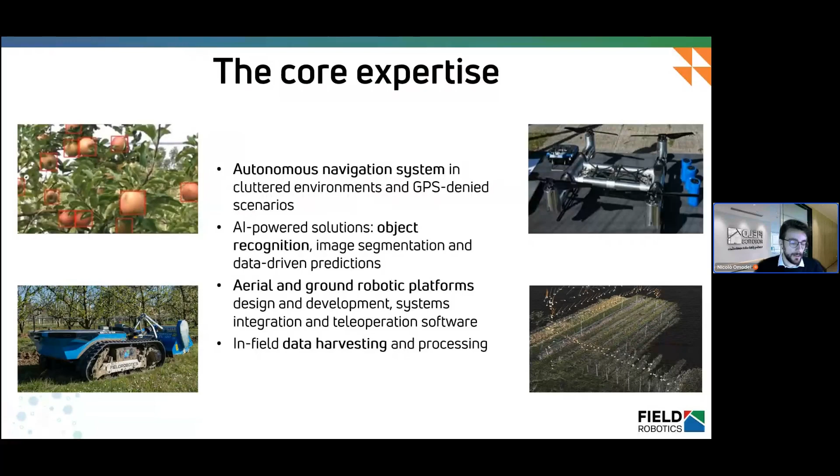FieldRobotics has its main core expertise in autonomous navigation systems in GPS-denied scenarios. Our algorithm, our software, can be applied to terrestrial vehicles, but also to aerial vehicles. With this kind of system, we are capable to navigate also where GPS is not present. We have, of course, AI solutions in order to perform image segmentation and object recognition. So as our vehicle autonomously moves in the environment, we are capable to collect data and perform what is called data harvesting, and then all the data will be processed in order to extract useful information.

FieldRobotics has 2 main divisions. The first one is the search and rescue division, which is focused more on aerial vehicles in order to perform search and rescue in very harsh environments and also land and sea defense. The second division is about agriculture. Here we developed a multi-purpose platform in order to perform every kind of operation needed inside orchards and vineyards. So today my aim is to show you the agriculture division inside FieldRobotics.

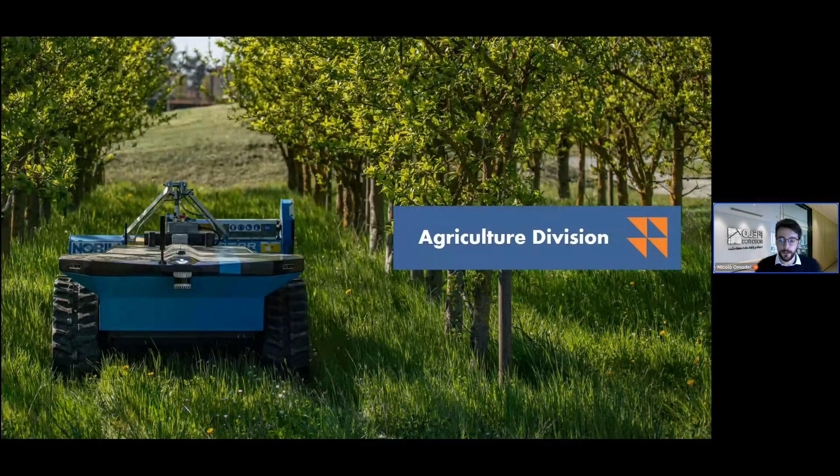Our mission is to develop and commercialize a platform which is fully autonomous and fully electric, and has a sort of plug-and-play array that allows the platform to perform every kind of operation. So the vision here is quite different from the standard, because we would like to redefine the tractor concept in order to not have anymore the traditional tractor on the field.

So the main concept that guided us during the whole development is that we would like to have a powered implement instead of a tractor pulling an implement. With this concept in mind, we can reach a compact and integrated design with a very lightweight structure, which allows us to have very low soil compaction in every kind of weather.

The other main concept and main feature is the adaptability and flexibility of the platform. You can imagine that once you have an autonomous platform working and moving autonomously in the field, you can then design a sort of plug-and-play array of implements.

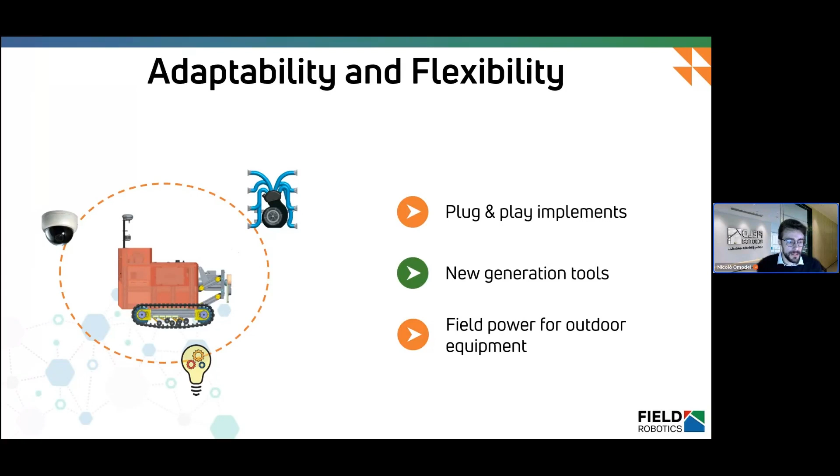Then another feature is what I like to call the power bank in the field, because once you have the platform that moves autonomously and you have batteries on that platform, you can imagine that you can attach every kind of thing you want and charge every kind of implement you want. I was thinking about maybe scissors in order to perform pruning, tree pruning.

Another big concept is the solution we have in mind: a larger number of small tractors is better than a small number of large tractors. We're used to seeing very big tractors in the field with a lot of power that maybe isn't needed. We have examples nowadays inside warehouses with AGVs moving autonomously and working as a fleet. We'd like to bring that fleet concept out from the warehouse and have a large number of small tractors inside the field, capable of communicating and collaborating together.

Here in the image you can see our first prototype, called Dedalo, with the features I told you before. We have a very small and lightweight structure, which gives us stability and robustness. This platform is capable of autonomous navigation and is fully electric.

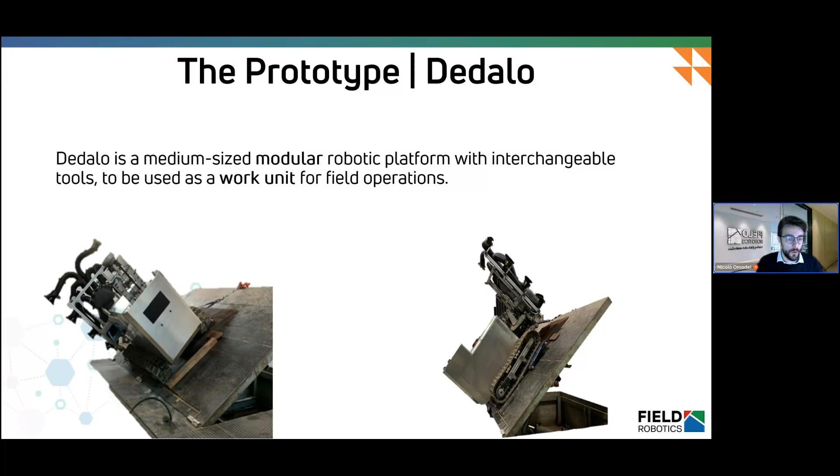Then we developed a second prototype with the same concept as the first, but with a very renewed design, more like an industrial product. On this platform we have more power: two 5 kilowatt motors for traction, and a 10 kilowatt motor just for the PTO.

Let's go more into detail about our autonomous navigation. This is a more technical part, but I'll try to keep it simple. I'd like to highlight that all the hardware, but also the software, has been developed inside FieldRobotics. We try to maintain a modularity scheme during development. In this scheme, every single software component performs a specific function in order to control a submodule or add new functionality to the vehicle.

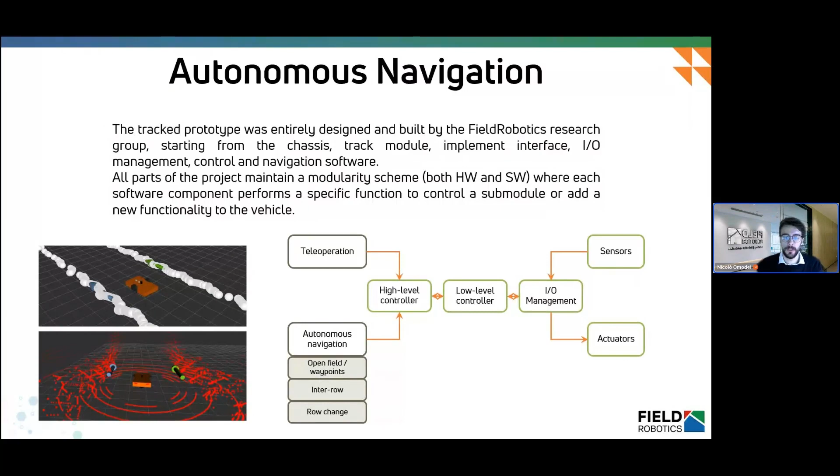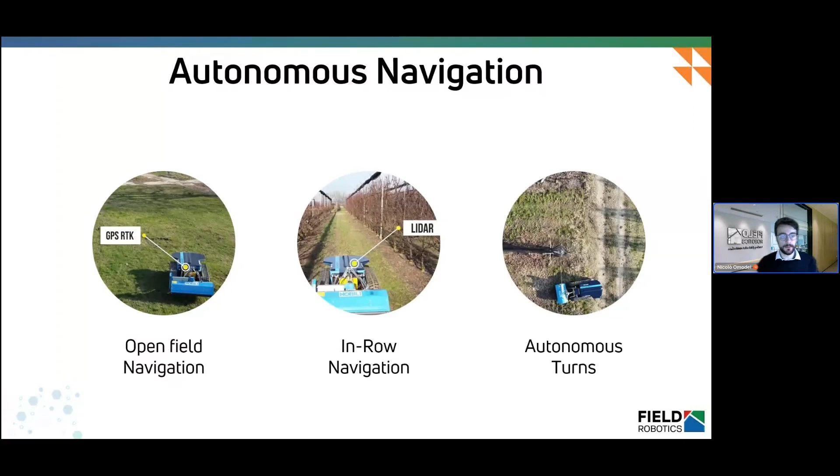So now we have seen a more technical part, but let's see how all these algorithms are used in practice. We have autonomous navigation, which can be divided into three main areas: the open field navigation, the in-row navigation, and the autonomous turns.

Let's start with the open field navigation. This is used in order to reach, maybe from the warehouse, the field in which we have to perform the operation, and it's a sort of waypoint navigation in which the user should set a series of waypoints or a series of roads, and then the platform will follow those points.

Once we are inside the rows, as I told you before, we don't use the GPS signal anymore, but we use just the LiDAR. This is because the GPS signal in some environments, in some conditions, cannot be as precise as we need, and so we just have to avoid this problem by using other sensors.

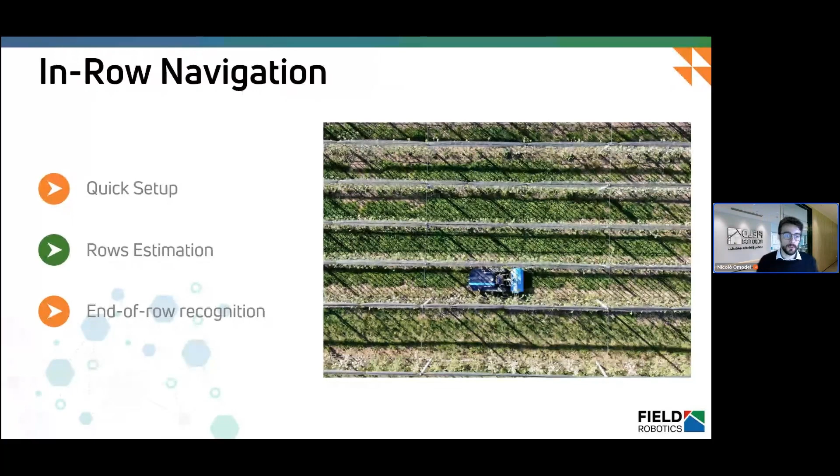And so once we perform the row estimation, we are also capable of recognizing the end of the row. So from a user perspective, the configuration is very, very straightforward.

We just need three parameters. We need the row width for each row, the first turn direction, because all the following turns will be the opposite, and then we have the number of rows that the rover must process in order to complete the whole operation. So just three parameters to perform the whole navigation cycle.

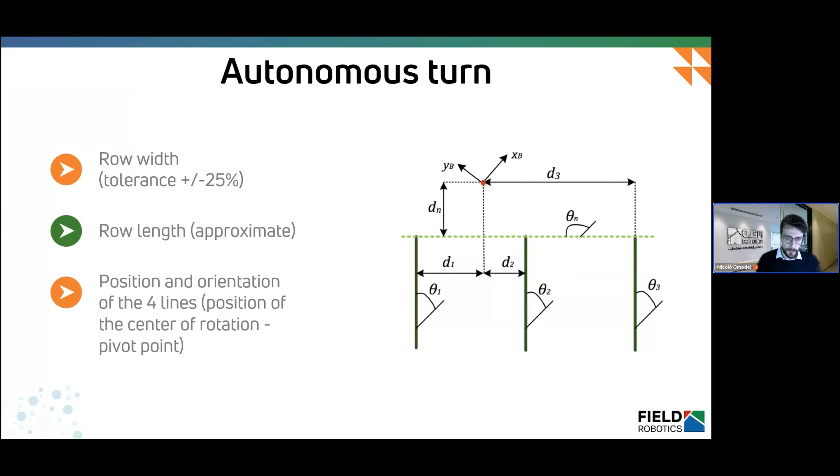Then when we are at the end of the row, we are capable of detecting the end line and computing a trajectory in order to go inside the following row. We can do that because we have the estimation of the actual row, and we can determine the position of the center of rotation, which is the pivoting point, in order to enter the following line.

An additional feature that we have is that we start estimating the next line from the very beginning of the operation. In this way, we are capable of achieving very high precision in the next row.

Here we can see an image. I like to call it robotic-friendly orchards, because we tested the machine in our experimental field in Bologna. Here in the picture, we have a type of orchard which is a planar experimental orchard. Those are apple trees, and they have a sort of two-dimension structure. This planar structure, of course, you can imagine, is quite easy to navigate inside.

But of course, we tested the robot also in several orchard architectures and also in vineyards. It has more than 1,000 hours in the field, test field.

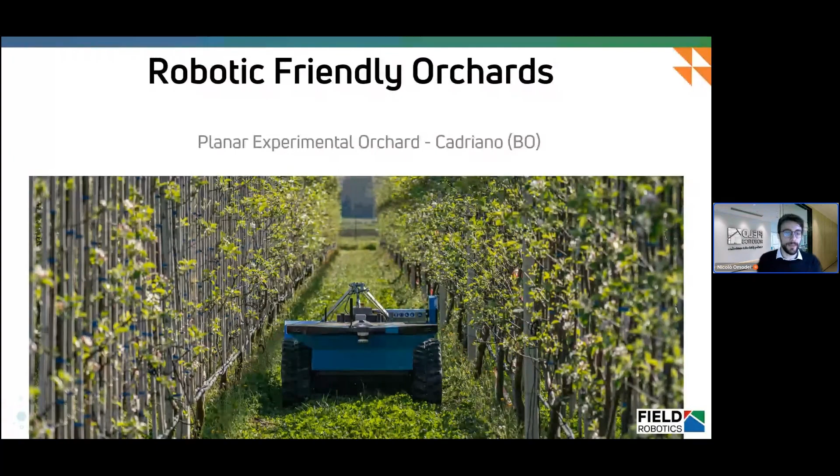Here's a quick brief on future developments. On the left side, you can see our low dispersion sprayer. We started from a traditional sprayer and adapted it to the rover in order to have very low power consumption. On the right side, you can see a tool which, again starting from a very traditional tool, we electrified. It's used to perform every kind of inter-row operation.

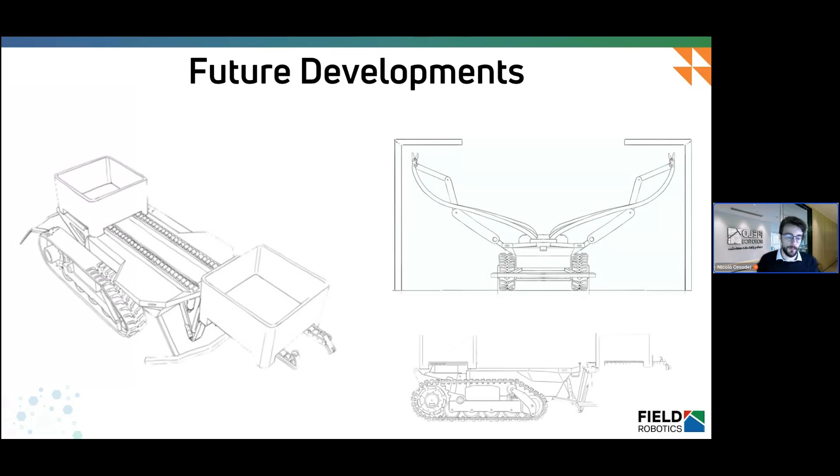So I think that's the end of my presentation. I hope that was as clear as possible.

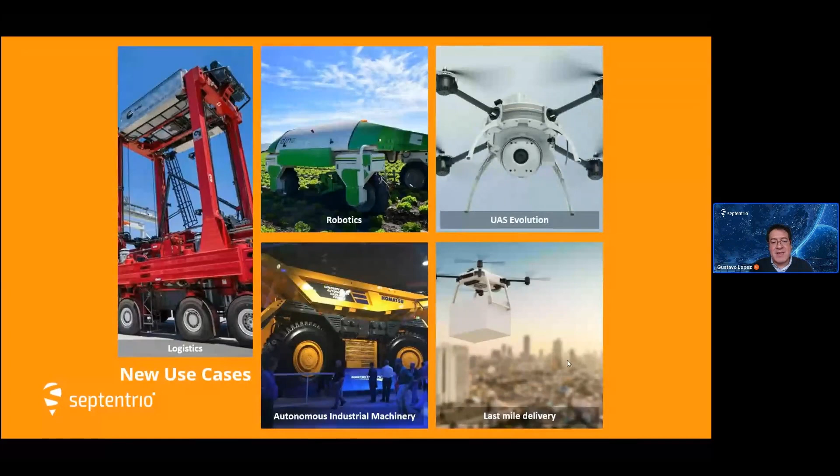There are different types of use cases where you already see autonomy, all the way from big machinery - as an example, here you can see a Komatsu haul truck. Autonomy was already one of the first places where this happened, and has been there for several years. But we also get to see other types of systems in logistics, ag robotics, as we saw this morning, last mile delivery, drones, etc. This is really an exciting moment that we get to see.

Let's start with the industrial side, the heavy machinery - what we get to see there. As you know, there are multiple companies, OEMs, creating these big machineries, and they are trying to move further into automation and autonomy of these vehicles in the market. Again, it all started with haul trucks that were already kind of autonomous, and we see those already deployed in mines and things like that. But we also get to see new types of vehicles trying to integrate autonomy into their use cases, for productivity or for other safety elements. That's what we get to see in industrial use cases.

And the interesting part is also how these autonomy levels are increasing over time in that market itself. At the beginning, when we are thinking about level 0, 1, or 2, these type of companies were focusing mainly on creating a basic autonomy and a steering type of autonomy, which was bringing productivity and efficiency. That was basically what they were trying to reach as a main goal.

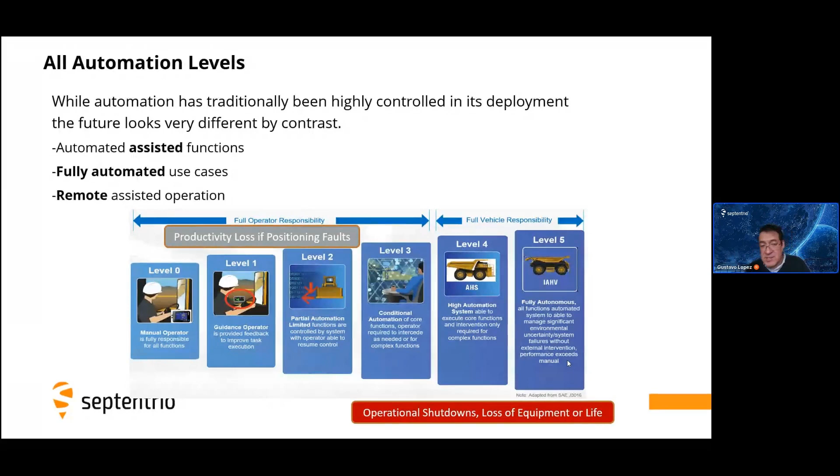But at the moment that we are starting to integrate full autonomy, the trends became a bit different. People really want to avoid operational shutdowns. They want to have a very safe system behind it. And therefore, the type of requirements that happen on the GNSS or the inertial systems out there are also changing over time. So it's very interesting to see what happens there.

Then we have robotics, and this is something also I love. I love seeing the talks, as we saw this morning, bringing fantastic new use cases in different areas. We heard about agriculture, but there are delivery robots, marine robots, mowers which are operating in different environments, such as solar panels which are obstructing some of the GNSS signals, security cleaning, snow cleaning, and many other use cases that we get to see in the market, which is very interesting to see how this is evolving.

And again, the requirements for precision and reliability are also increasing. So this will give you a bit of a view of the trends or main demands that we have in the market from the GNSS point of view.

People want to have systems which are smaller, not for all types of robotics or all types of systems, but even if you have a box type of system, they would like you to have it also in a small form factor. Or if it's a very small robot, then you would even like to have a module behind it.

All these types of robots or drones sometimes are working with a lot of electronics, communication. You have a processor behind it, data recording. So all this could also create some unwanted interference in the system, and you need to be very resilient against those types of interferences.

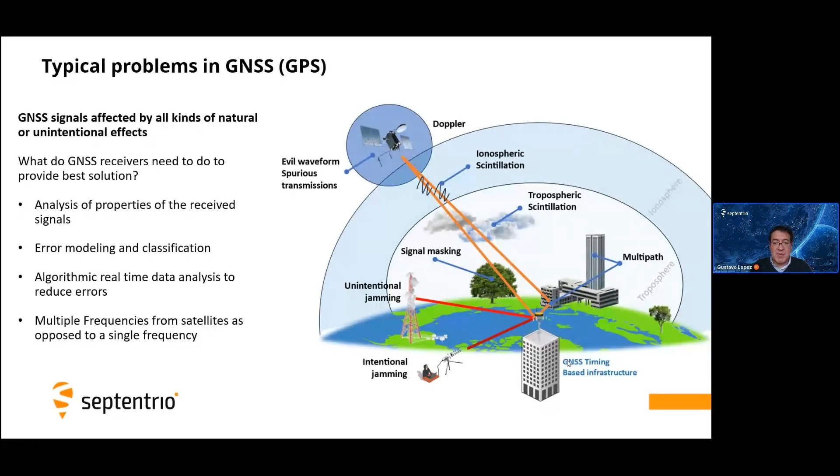So a reliable GNSS really needs to overcome all these types of problems. And this is also what we try to do at Septentrio, working in all these different areas to mitigate that, bringing a GNSS system that, as an example, has multi-constellation, multiple frequencies that can support anti-jamming, anti-spoofing for those security problems, that can work with different correction services out there, because there are a lot of new correction services and new companies popping up. And again, keeping it as small as possible while providing you the right interfaces to interact for your autonomous system, for your robot, or for your own integration.

So let's go a bit deeper on this reliability topic, and what are the things that we are trying to do in order to mitigate that part. But let's first try to define what we mean by that reliability concept.

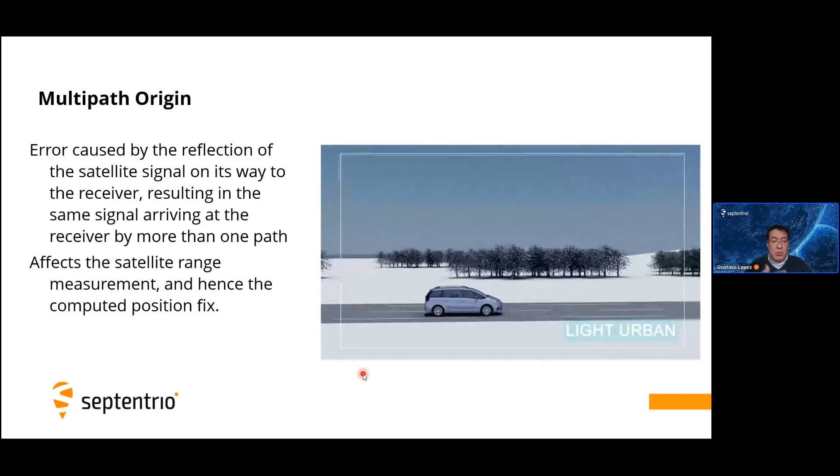Multipath is basically the reflection of GNSS signals when they hit walls or other surfaces. As an example, in agriculture robotics, sometimes you have trees, and trees with water are a very important element of multipath for GNSS, because we have those reflections of the signals themselves.

So how can you remove or mitigate multipath error? There are different types of techniques, and I've grouped them into 3 elements. One could be the design of a new signal system. As I told you, there are certain signals capable of handling multipath better, like the BOC or AltBOC signal. Another mechanism could be using other backup signals, or correlation techniques, which is mainly algorithmic. And the third element is antennas in the market that can also reduce multipath effects.

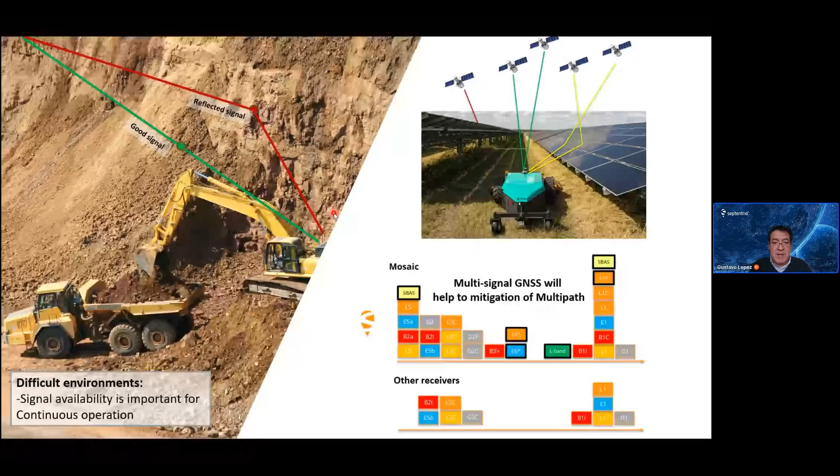With all this machinery and automation happening in robots or big machinery, there are a lot of reflections that we get to see, so multiple signals will help a lot. And of course we also have algorithms. As an example, here you can see how we can reduce multipath using some proprietary algorithms in the GNSS element. That makes a difference on those difficult environments where GNSS reception is not ideal.

Briefly on the security and resilience side, we get to see this more and more. Customers integrating autonomous technology are having problems with jamming and spoofing, and unfortunately this is happening more and more due to the geopolitical situation nowadays. I'll explain some of those problems in a minute.

Then you have spoofing. Spoofing became very popular with Pokemon Go, but it's basically sending a signal that pretends to be the authentic GNSS signal, when in reality it's a wrong or fake signal taking you to an undesired location. This is something you won't want, and it's happening more and more. Before, spoofing really didn't happen, but the technology to do it became more available, and the fact that there are more robots out there is creating a big problem. Imagine your mobile robot suddenly going to the wrong location because somebody is spoofing it nearby—it's becoming a problem.

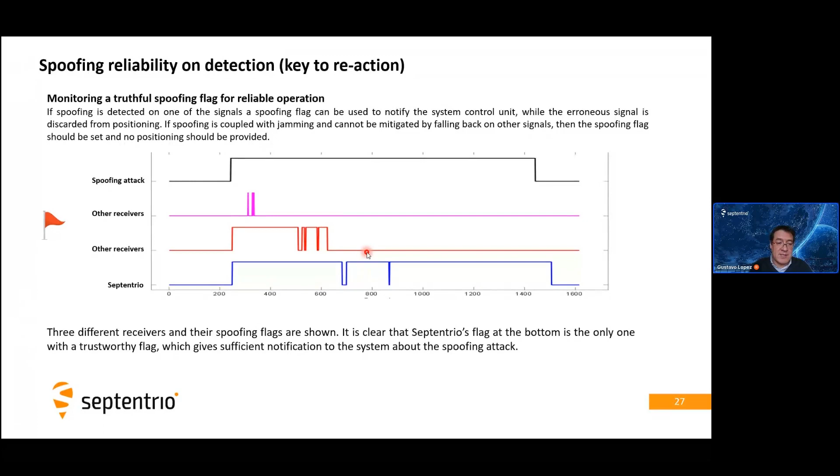Then you have certain receivers that sometimes might detect the attack, or maybe they will not detect it at a certain moment. So the reliability of that spoofing flag is really quite important, because then you can tell your INS or your sensor fusion system that you can no longer trust the GNSS. This is also very important, and we are really trying to make sure that's quite reliable on our side.

Other elements of robustness, just to mention: when you have a GNSS system in an autonomous vehicle or robot, it's operating in multiple tough environments, and there's a lot of vibration in some occasions. Some people think a small robot isn't really vibrating a lot. You can also see there's rough terrain in many occasions, which could trigger problems with the GNSS technology.

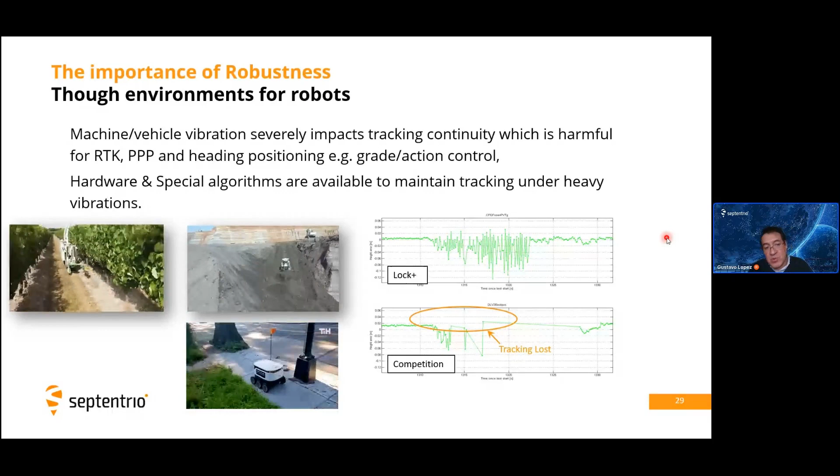So you need reliability also in the choice of GNSS that can bring you a good, robust solution for the whole robot itself.

This is my last part, going very briefly into the integration with Movella, and some of the data I actually got thanks to the team from Movella. The beautiful part is you can integrate a Septentrio receiver together with Movella systems.

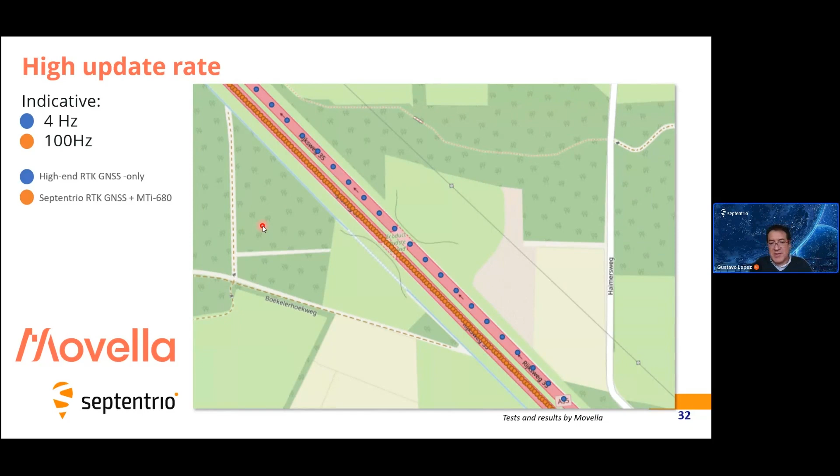They have done a few tests that you can see here as an example, comparing a Septentrio RTK receiver combined with the Movella system versus other high-end RTK systems. This example shows the value of the high update rate you can get with this combination.

You can see the dark blue line, which is the combination of these two systems. Another example again with dead reckoning, a bridge of 21 meters. Again you can see how that reliability definitely helps the final solution.

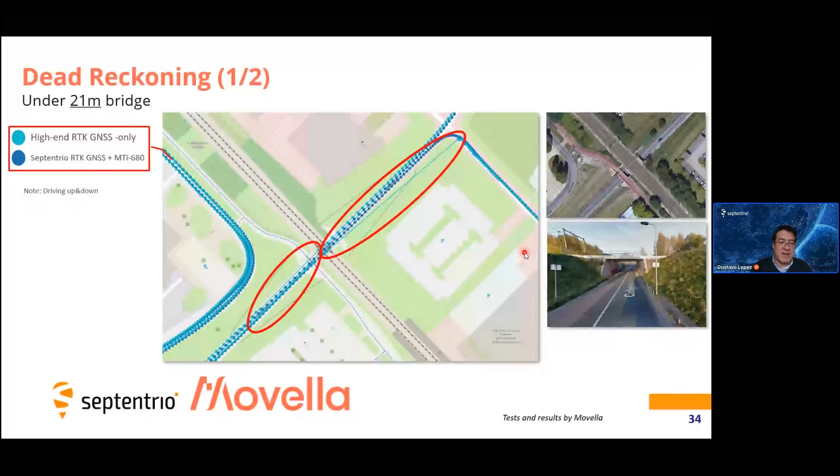These are very nice examples. Again, thanks to Movella for providing this test. So how will you integrate it?

Well, you have two options. Option one: you have a dev kit from our receivers that you can use together with the dev kit from Movella. This is fully documented in an article you'll find online. Or option two: we did an open source project integrating the Mosaic into a mikroBUS-compatible board, using the pin compatibility that these types of boards from Xsens Movella use.

So that's definitely an option too. But option one is already fully documented, fully working, and we definitely welcome everybody who might have questions on that.

Reliability can be quite important, but to predict the future is up to you. I'm sure you'll come up with a lot of exciting applications integrating either GNSS or INS systems. So I don't know if there are questions, Minder, at this moment.

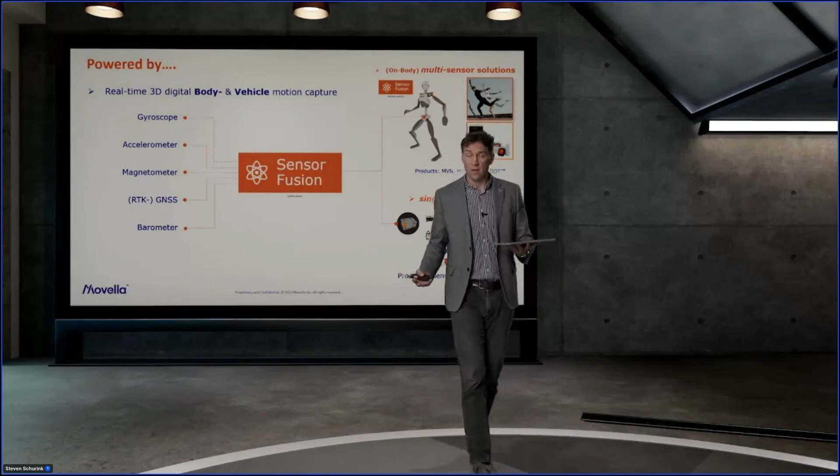These are typically applied not only on land-based vehicles like we're treating today in this conference - outdoor and indoor ground vehicles, AGVs, AMRs typically used indoor - but outdoor there's many other vehicles like in the agricultural scene, person transport or goods cargo transport, container terminals. These are typical ground vehicles that need digitized movement data to either autonomize the vehicle, make it safer or more efficient, and support the operator.

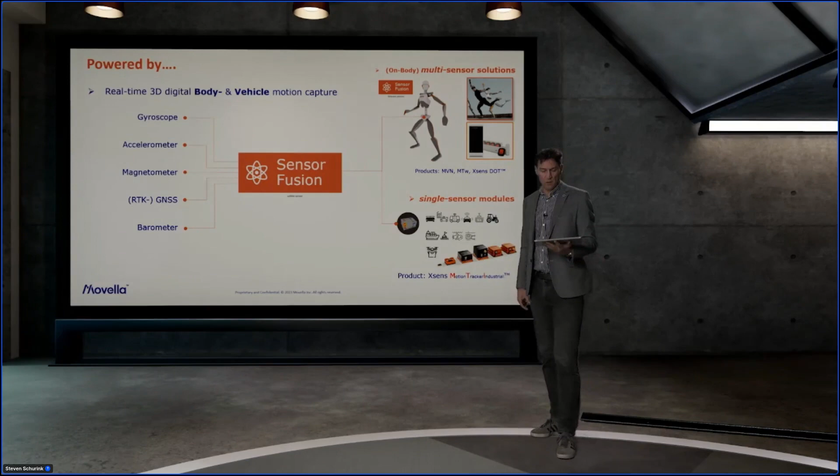The other markets we're also serving include service vessels and also buoys and typical underwater robotics - a very interesting scene where a lot of innovations are taking place. The last is flying, like Gustavo shortly showed in his presentation, like last mile delivery of packages and these kinds of drones, but also other drones for surveying areas. So these are typical applications and markets we're serving with the single sensor modules, the MTI series.

A little bit more detail on this MTI is basically the data that we are providing to our customers' subsystems: 3D orientation and global position data.

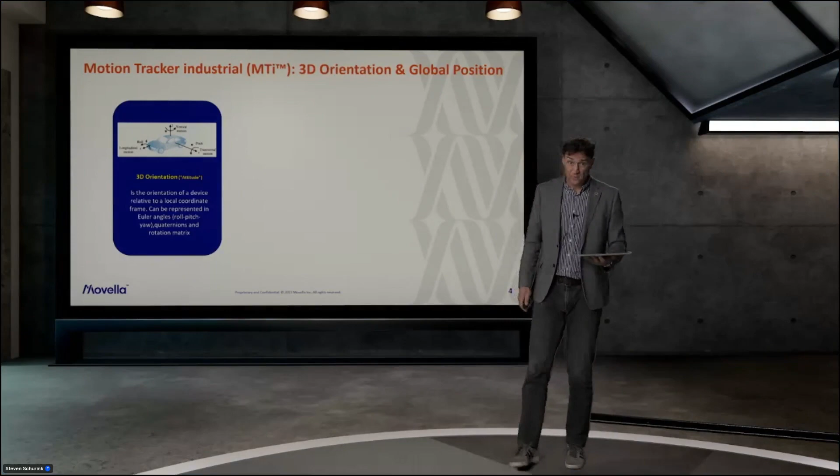So what is 3D orientation? It's typically the roll, the pitch, and the heading, but also linear acceleration over X, Y, and Z. So it's the orientation of the device, or the vehicle in this case, mapped on the earth-fixed frame. They call it ENU, so east, north, up frame. We give you the orientation of the vehicle on that frame. So that's 3D orientation, something else than 3D LiDAR. Not completely the same, but both are 3D.

In addition to the 3D orientation, we provide our customers with the global position data. As in the previous presentation, there are different brands of GNSS, of course. This is typically the position of the vehicle relative to the geographic coordinate system, so latitude, longitude, and also an altitude indication.

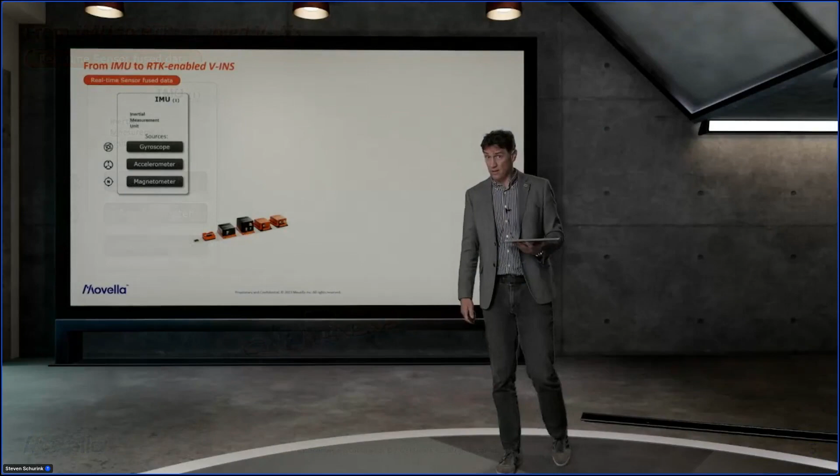So what does this look like in detail in our sensor? We can offer our customers different levels of data. Some customers say, hey, I just need the raw data from the gyroscope and accelerometers, I will do my own Kalman filtering. That's fine, we will supply to you an IMU. That's the basic level of a typical inertial measurement unit. It's raw but calibrated data that our customers use to determine the 3D orientation of their vehicle.

The next level, when they start using our Kalman filtering, also the Xsens Kalman filter algorithms, then from the same sensor you get the roll and pitch angles, and also the unreferenced or relative yaw in the flat plane, which is typically used for navigation. And that's the subject of this conference.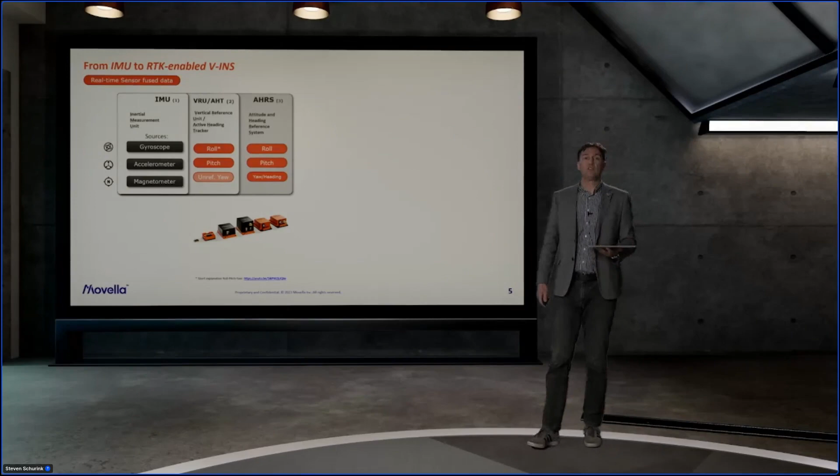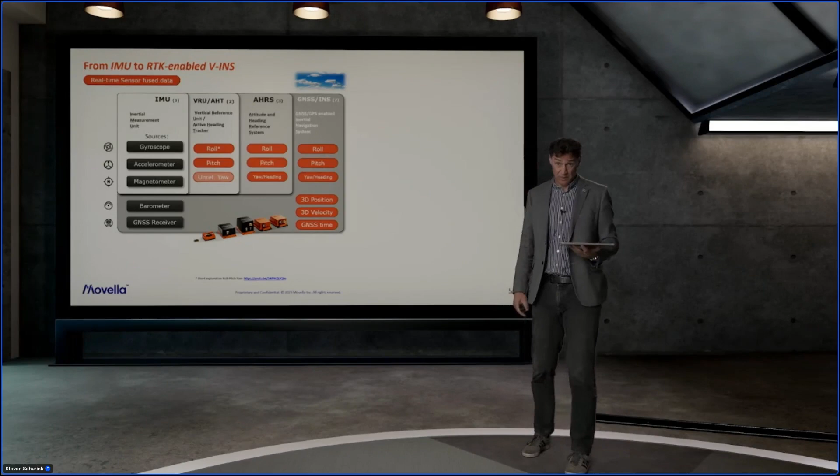Again, a next level is we start using the magnetometer, so you also have absolute north referenced heading, not relative angle but absolute north referenced. Then the next step is to use also your GNSS data when you are outdoors. We can improve the 3D orientation data, and we can add position, velocity, and sometimes also necessary for customers, the GNSS time being the master clock of their system. So in this case, we can offer even more data for the vehicle.

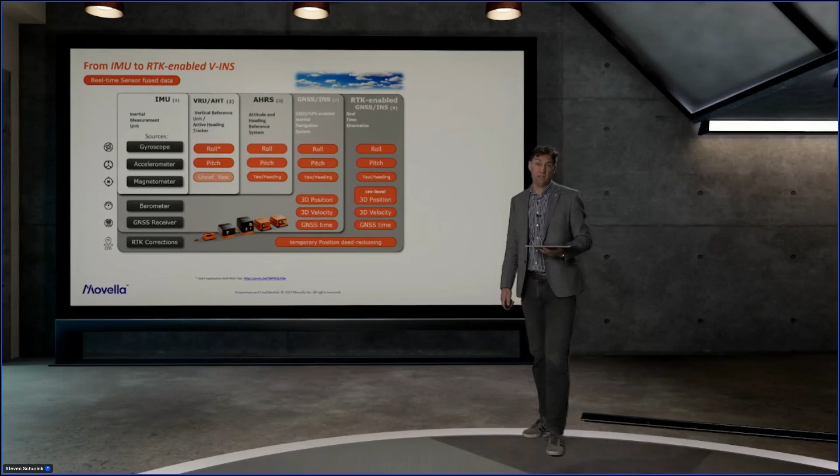One level higher, really coming up in the last years, is to have this position centimeter level accurate. What we do there is also small temporary dead reckoning. So when you have a bad GNSS connection, like Gustavo already indicated, can be multipath or other reasons why the connection is bad, using your IMU we can do some more dead reckoning. We can also provide a higher rate of data, which the subsystems of these vehicles often need. They are using LiDARs, cameras, very high rate data, and these all need to be synchronized with your own orientation.

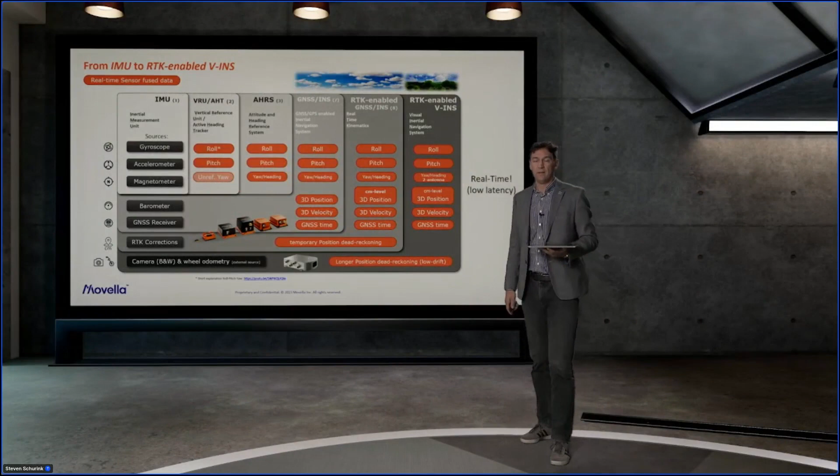But what if your connection with the satellites is not so good? So you are, for example, under a canopy of trees, or going into a tunnel. What should we do then? Well, we can still provide you with centimeter level 3D position, still real time and with low latency or low delay. But we are using a dual antenna when you still have good GNSS position, but mainly we are starting to use also a camera. Like we do as a human being, we use our eyes to determine our speed and where we are, using it as part of our navigation. The same thing we can do now in the sensor world.

And we are doing this with our partner Fixposition, they will later on also present more details about this product. You also see this small wheel odometry measurement. Yes, also wheel odometry, if we're talking about a ground vehicle, we can input the wheel odometry to further improve the velocity estimation, and therefore also your new position if you don't have a good proper GNSS connection.

So what does it look like? Well, typically if you move the MTi, I'm not talking about position here, but only the 3D orientation, this is typically what happens, and this is the data that these autonomous vehicles use in navigating, especially challenging environments like Nicolas already indicated, with high slopes and bumpy grounds. It's very important to know in real time what is happening to the vehicle.

These products come with application software, so it's easy to take the data, set the sensor up, and start using it.

If you have any further technical questions after acquiring the sensor, we have a very nice platform that is continuously maintained by our field application engineers. They talk with all the customers out there, we have more than 1,000 different customers, and they all give us feedback which we use to improve the product. This is typically what we try to do through our field application engineers. They update all the data in there, it's all available, and the customers can use it and do it all by themselves.

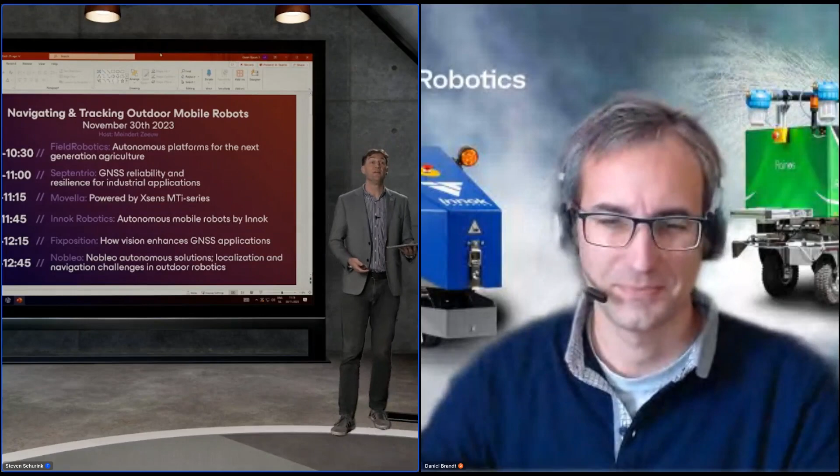Daniel, are you with us? I hope so, can you hear me? Yes, we can hear you. Thank you very much. So from the cold Netherlands, we move to the cold south of Germany. Steven, thank you very much for the introduction and especially for your presentation before mine, because now I don't have to tell people where your Xsens sensor is used in our robots.

So first, some words about Innok Robotics. We were founded already in 2012 in Bavaria, and now have 35 full-time employees. Our last financing round was in December '22, where we raised 5 million euros.

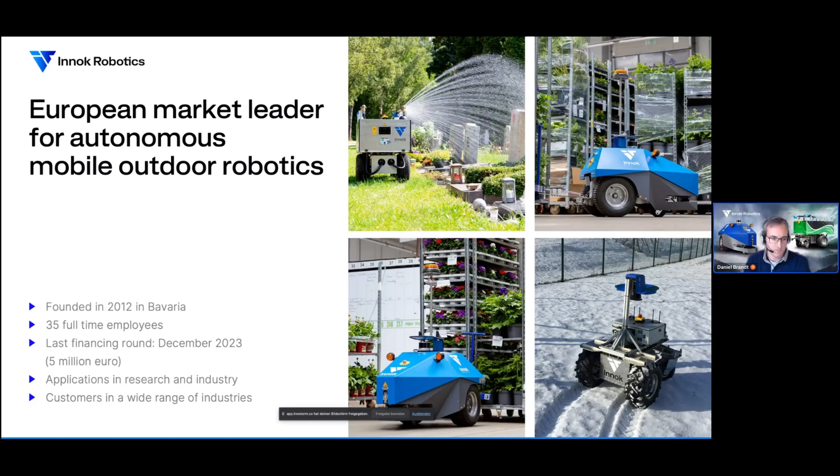With our autonomous mobile robots, we have applications in a lot of research in nearly every industry, from manufacturing to logistics, health, food, anyone that has transportation needs. So we have customers in a wide range of industries.

What's so special for Innok? The first and most important point is we can handle missions indoor and outdoor, and we don't need any special signage or modifications to the plans for our robot to navigate. We use a very complex portfolio of sensors, and the Xsens is one of them.

The market for autonomous mobile robots is extremely increasing, and with our transportation robot, the Induros, we play in one of the most growing fields.

This is where Innok is coming from. The initial product, the platform, is the Heros. This is available as a two-wheeler or four-wheeler - the Heros is the scalable and flexible robot platform for our autonomous mobile robots, especially all-terrain robots in indoor and outdoor areas.

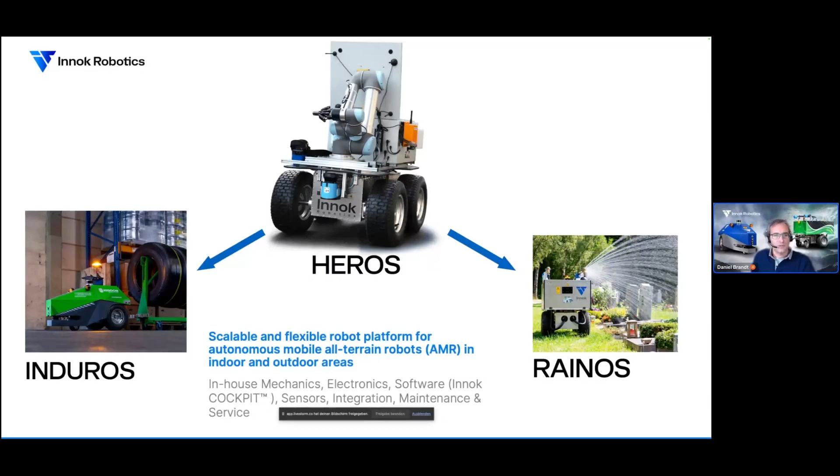So let's dive into the Induros, our transport robot for indoor, outdoor, or combined missions. It's extremely robust for all weather conditions, poor soils, or ground sills - every ground condition. It's capable of autonomous coupling and uncoupling of trailers. You can see it in these pictures, and I'll show you a video after this slide.

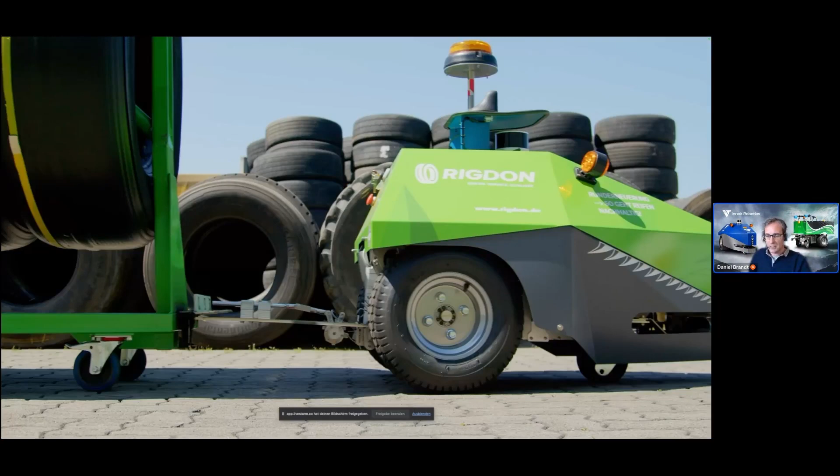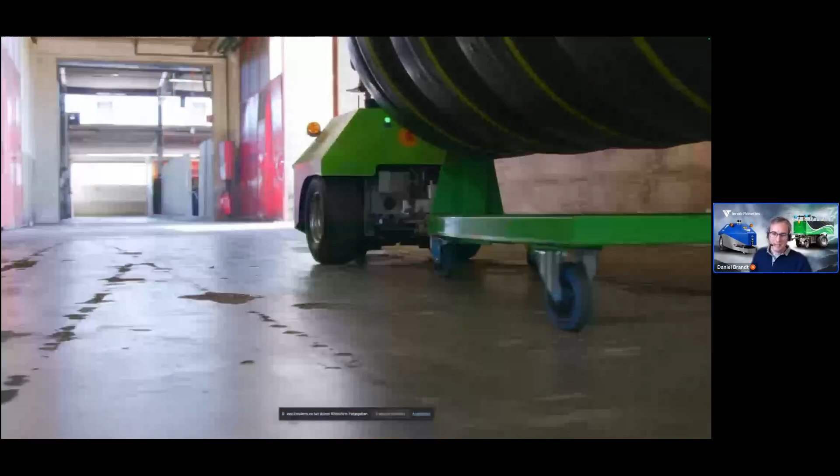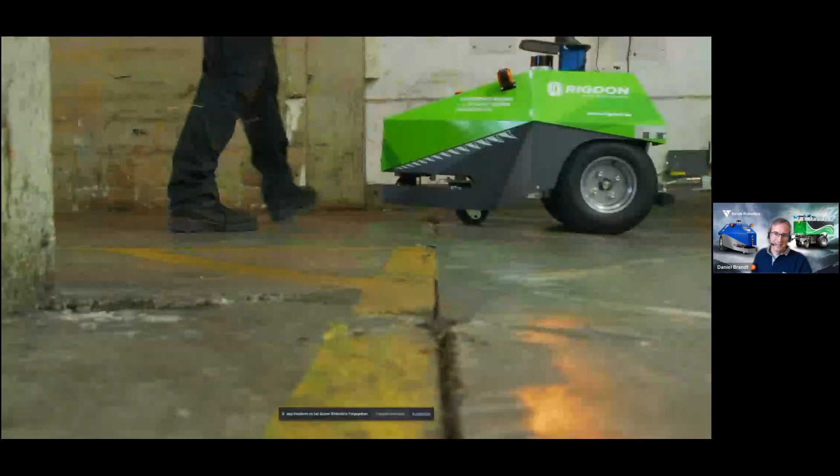The video is without sound, but I'll tell you what you see here. You see the Induros driving outdoor. That's the company Rigdon, a tire manufacturing company using the Induros for transporting tires from outdoors to indoors, and from indoors to outdoor storage. Here you see they have a very bad floor, but the robot has no problems with it. You can see the autonomous coupling and decoupling. Again, the bad floor and soil. And it's super secure - here you see an employee jumping in front of the robot, and it immediately stops. That's the Induros.

Our second main product is the Rainos, the irrigation and watering robot.

Coming to the Xsens technology, we use it especially as an IMU for accelerometer, gyro, and odometry data. Inside our complex setup, especially when driving outdoors, it's extremely important for Innok to have data on what the robot itself is doing - not only where it's driving, but also how it itself is moving.

The Rainos is especially for cemeteries. It can water up to 15 hours a day, especially at night when no people are around. But we also have some cemeteries using it during the day for advertising - it says 'Hey, I'm watering your grave. If you also want me to water your grave, call my owner.'

The Rainos refuels autonomously at the watering station. It's super easy to use with our Innok graphical user interface, where you only need a web browser to communicate with the robot. You'll see this interface in the upcoming video. This robot also has the same high security standards, even a little higher than the other robot.

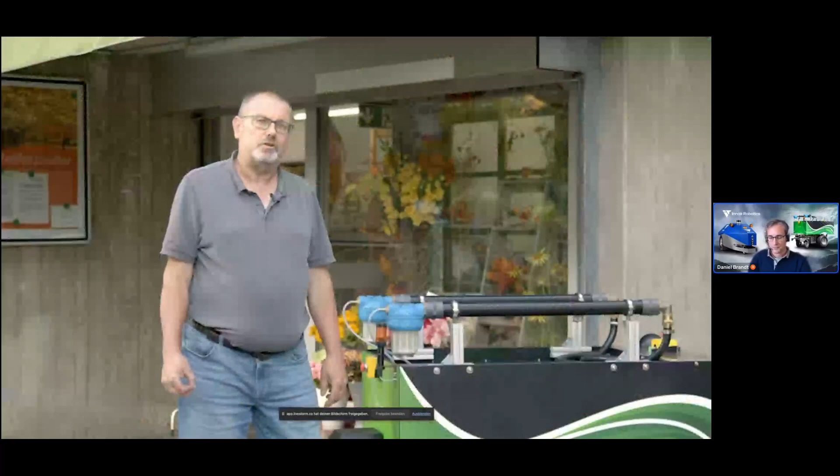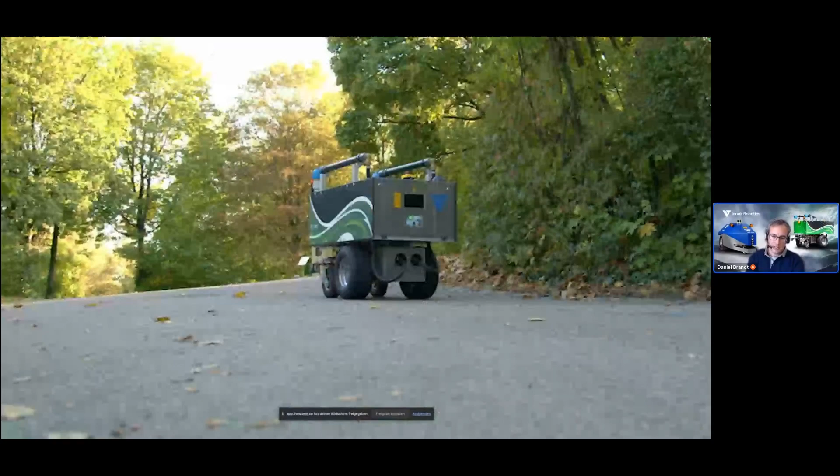Here the owner of the robot is telling how he is solving a lack of personnel with the robot, because finding people to care for graves is very difficult. The same with the transportation robot. Where the robot does the job of some people, those people can do work that's much more worthy.

Here you see our graphic user interface where the robot is driving. The robot is saving time, very efficient, and people can care for other more important work on graves, or for the transportation robot also in the facilities. He's asked how people react to the robot, and people love it, even at cemeteries. Here you see it driving and watering at night.

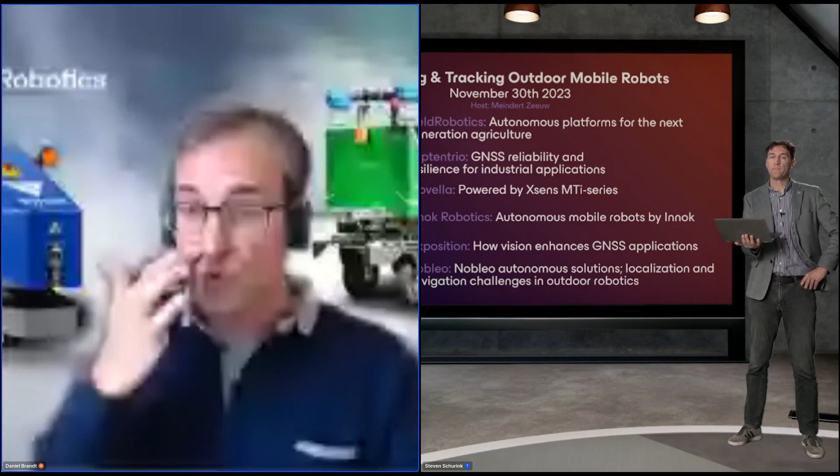It depends on the gearbox. The transportation robot can move up to 6 kilometers per hour. We've sold some that move faster, but the standard is between 3.5 and 6 kilometers per hour for the indoor transportation robot. The outdoor transportation robot moves slower because it's moving on bad soils, like grass and holes in the soil, and it's carrying 250 liters of water with it, so it has to move a little slower.

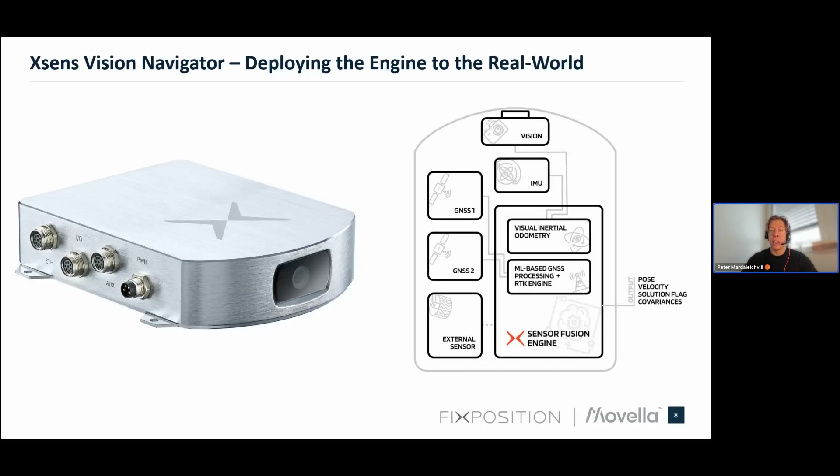So the XVN is one of the best solutions on the market to use in environments where dead reckoning is necessary, where GNSS alone might not be helpful, where mapping might be complex, or where you might be navigating between environments where you can map certain indoor areas but outdoor ones become too complex or change too rapidly, or even if you need some redundancy there.

But in practice, getting such an optimization to work well is very complicated. So we need to train our algorithms to adapt to the environments and platforms on which they're being used. Now the XVN doesn't automatically record any data, but customers that have challenges in different environments are able to record the data, share it with us, and we can train our algorithms and redeploy that to all our customers.

These platforms include urban settings such as delivery robots, street sweepers, tractors navigating through orchards, lawnmowers. There are a multitude of applications here.

So how exactly does this retraining of the model and deployment help? Well, it helps us identify spoofing and reject bad GNSS. We're also able to identify false fixes, and this is one of the things that Septentrio was correctly pointing out, that sometimes you can have measurements that are inaccurate, but they tell you they're very accurate.

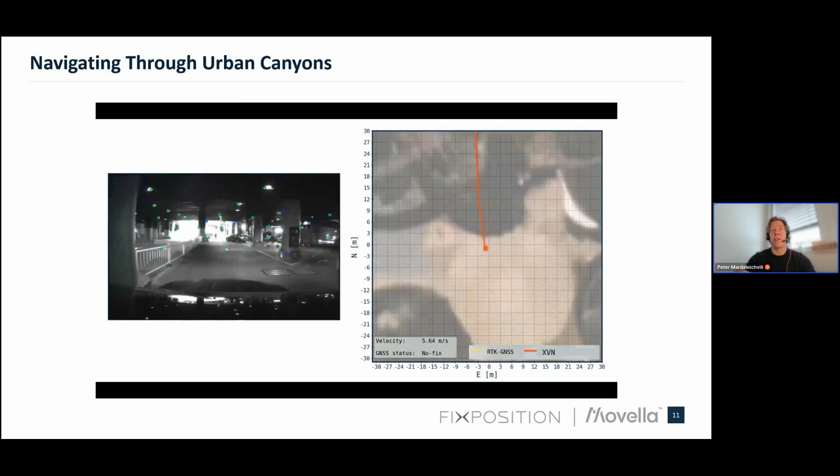So we just went into a tunnel, the GNSS completely disappeared, there's no more signal, you have nothing at all. All of a sudden, the GNSS comes back, but it's 20, 30, 40 meters away. Even here, we're still between canyons, the reception is still bad, the GNSS performance is still at the 10-meter level, 3-meter level, and only once you get to open, it rejoins the XVN's position down to centimeter level accuracy.

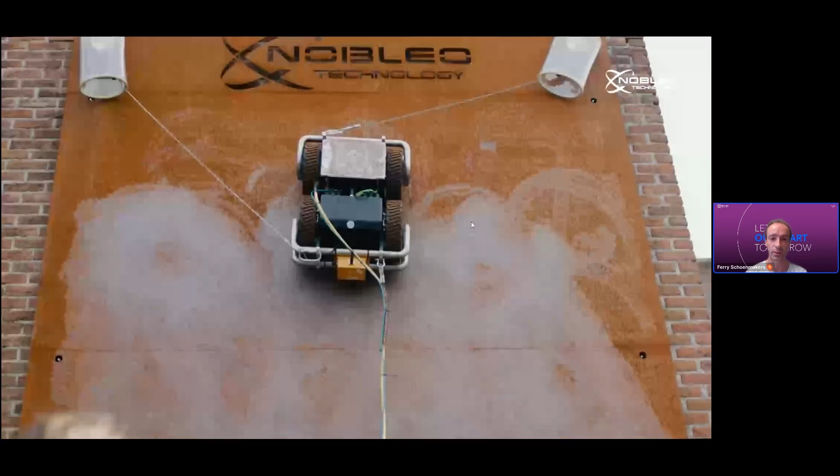So Nobleo started in 2011 as a consultancy company in the high-tech domain. And since 2017, we are also a projects company, which means that we also do projects in-house for customers in the high-tech domain. So we do all kinds of technical projects, which I will come back to later, with a lot of expertise combined, with a lot of mixed teams working on these projects to get to all kinds of solutions. So we have a big focus on a good team, which means that we can make nice solutions, but of course we also focus on nice activities.

So already some of our solutions are here in the video, which we will come back to in a few slides. And also some of our expertise is highlighted here. And this is, of course, the part where it is also interesting.

So where are we situated? We are in Eindhoven. We are now living in the Petrakerk, a former church, which is now being rebuilt as the Nobleo office, fully inhabited with Nobleo people. Actually, this building is already getting a bit small, so we're looking for other housing because Nobleo is growing.

We're also neatly situated in Eindhoven near the high-tech campus, near big companies like Philips, NXP, ASML, but also close to the University of Technology in Eindhoven. So we have a nice link with new technologies and new students.

So basically, if you look at Nobleo Technology, we have three big pillars in our company: autonomous intelligent systems. Autonomous is the part I'm talking about today, a domain where we develop all types of robotic autonomous applications, basically to relieve us of dirty, dull, and dangerous jobs.

Then we also have an intelligence sector, where we develop all types of vision applications, AI applications, neural networks to help customers with those kinds of problems or issues. And we also have the systems pillar, where we focus on the high-tech mechatronics domain.

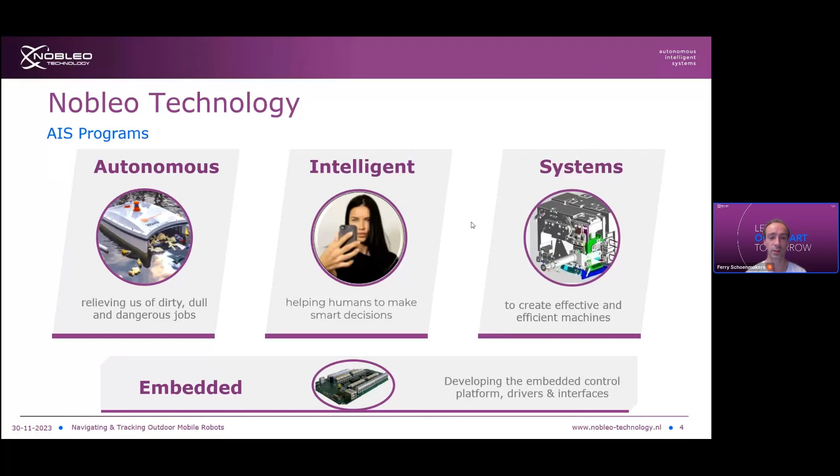So we have a lot of CAD engineers, dynamics and control people working on very high accurate systems, for example for those big companies in the region of Eindhoven. Underneath, we also have the embedded part of Nobleo, a big team supporting us with embedded control platforms, software, drivers, or even electronics design to support our three major areas.

So we're a consultancy company by origin, but nowadays we also do projects. We have a lot of mixed expertise in-house. We do very well on system architecture and system design, but we also have a lot of people working in the software, electronics, and mechanics domain. And that's why we can support all these different types of projects.

So basically we had a box with a custom PCB inside, a computer stacked to this PCB, and our software stack. With this box, we were able to more easily get robots up and running. So the first one to prove that was Dory.

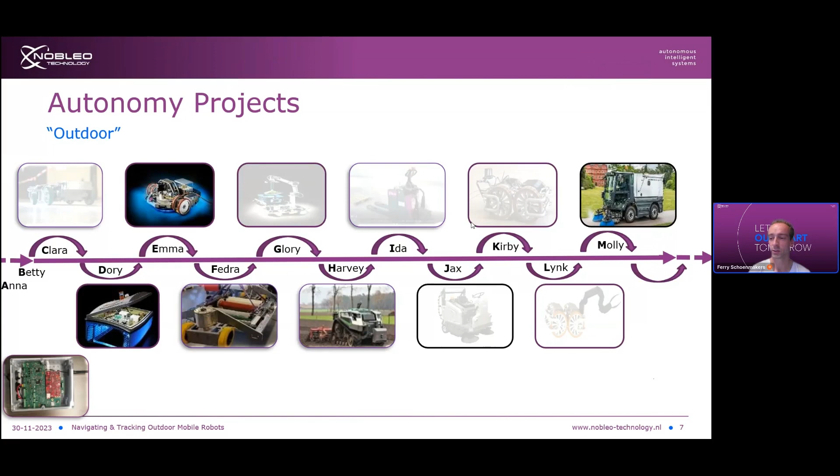So to start with Dory, which is depicted here a bit bigger. As told, the company RanMarine came to us to help them assist with the technology part of this aqua drone, which is called WasteShark.

And one of the first challenges, of course, here is cost. To have a feasible business case for this robot, the platform should be quite low cost, such that people actually want to buy it and deploy them. And it would, of course, be even better if we can deploy fleets, so multiple of these robots.

The drone is actually driven with 3 thrusters, and of course it's a boat, so if there's some current in the water, it can drift a little bit to the side. So it's very hard to get any useful information from these thrusters for our localization. If you have a wheeled robot, you can use the wheel odometry to include in your localization algorithm. The thruster commands here are hardly usable actually.

The localization required for this robot is not that highly accurate because we don't really need centimeter accuracy here, but of course we do want to know where this robot is. Thus here we chose a combination of a GPS, an IMU, and an electronic compass, because it's also worth noting in what direction you are looking. And a good thing about this aqua drone is that you're not so often close to metal structures, so an electronic compass is often sufficient enough to localize this aqua drone in the place that you want to be.

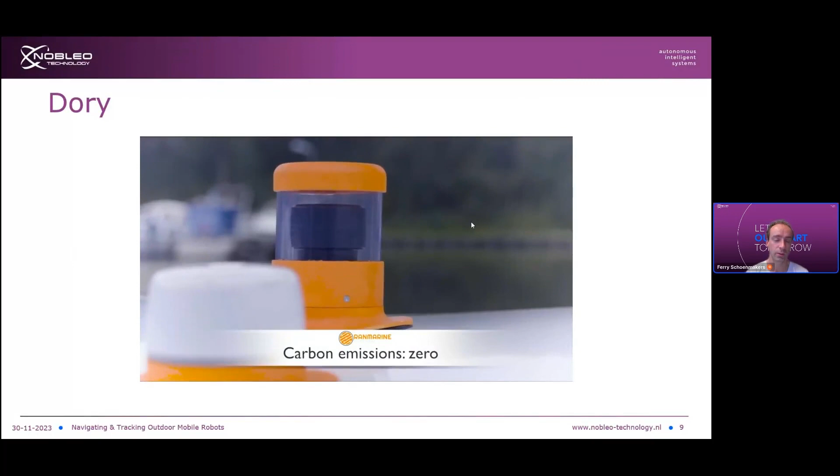So here a little movie from RanMarine to show what this WasteShark is actually doing. You can see that on the top of this WasteShark there's also a LiDAR installed. But mostly if you're on the water, there's not that much features to map. So this LiDAR is mainly installed for anti-collision purposes, so that if we come close to other boats or vessels, we don't collide with them.

So that's the Dory application, and throughout this application, and all the other applications, you will see that often we combine, as many people do, a set of sensors for localization. We fuse these different sensors together to get the best position estimate with this sensor set. A famous way to do it is with the well-known Kalman filter, which the previous speakers already mentioned. That's a way to fuse multiple sensor inputs together. Sensors with different rates can be combined, and sensors with different precision or accuracy can be combined.

Of course, it's not an invention of Nobleo, it's mainly our expertise. The biggest expertise here is the knowledge of how to neatly fuse these sensors, how to pick the correct gain matrices to make this fusion go the way that you want. So I won't go into big detail about this Kalman filter concept. If you want to know more, we did a publication in the Dutch Mikroniek magazine, the 5th issue of 2020, where we tell a bit more about this concept.

So the next application is basically the range of magnetic crawlers, which in the timeline were called Emma, the Beetle, and Fedra. Most of these crawlers are industrial cleaning applications. For example, in the oil and gas industry, where you have a very big oil storage tank and you want to clean it or strip the outside from paint. But you can also do inspection, for example.

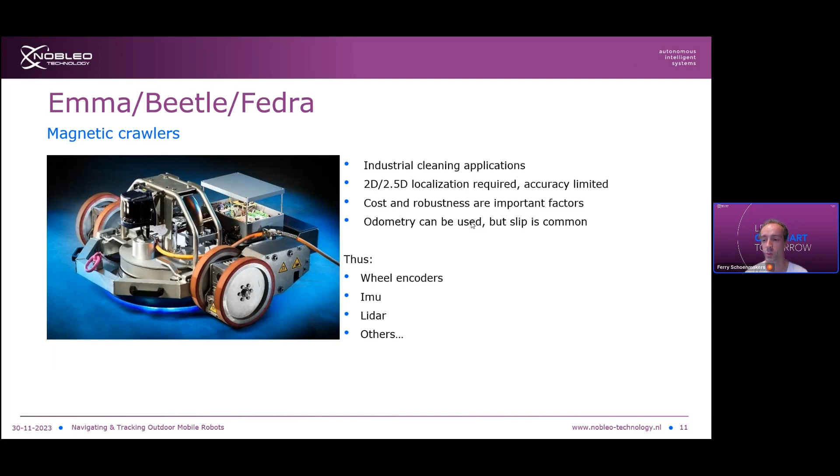So our localization solution here was a combination of using wheel encoders, again an inertial measurement unit, then the 9DOF variant, which Meindert talked about in the previous presentation - basically with all the sensors included. But there are also other solutions which I will highlight a little bit later.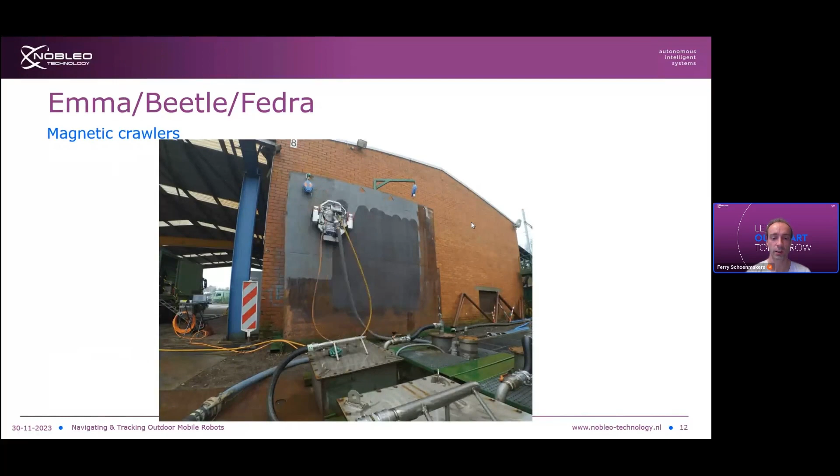Just to get an idea here, first a video of one of our first tests with this platform, where you can see one of the typical applications. Of course, this is a test wall - it's not the size that we usually do - but here you can see the robot driving certain vertical lanes. There's a high pressure water sprayer attached to clean this surface, and there's also a hose attached to suck back all the water and debris that comes from this.

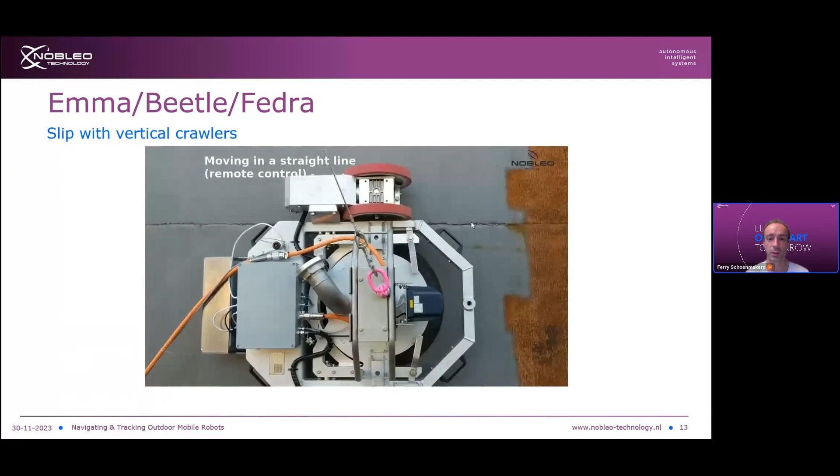Just to highlight again how important this slippage is: here we can see the same robot, and this time the operator is driving the robot with the joystick. The command for the robot is to go perfectly straight forward. But you can see that while driving, the robot is actually going down slightly because of the shear happening in the wheels due to all the big forces involved.

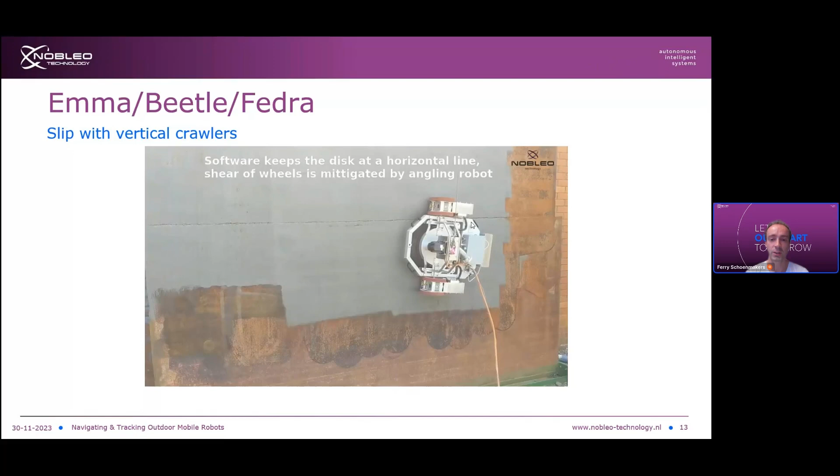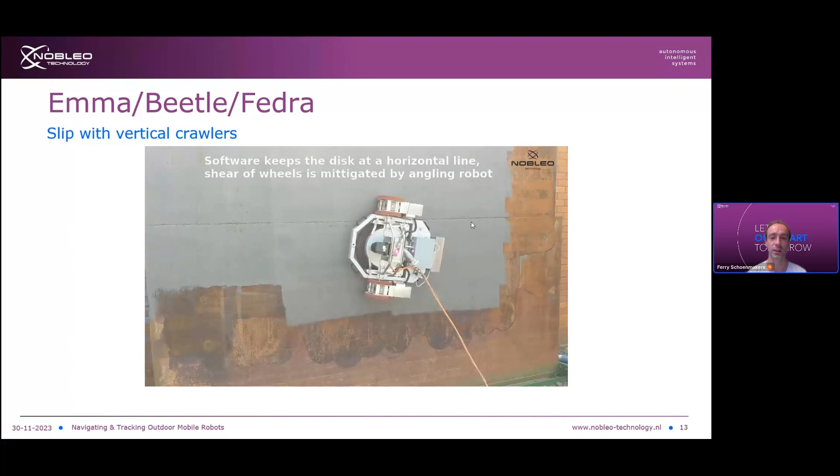So that's tricky, because your wheel encoders will tell you you're going perfectly forward, but in reality you're going downward. What happens now is if you switch on our autonomy software, it will notice this and compensate for it - you end up with a robot which is slightly angled, but by being angled you compensate for the shear of the wheels, and you are in fact driving perfectly straight. If you compare the black handle of this robot with the weld line on the steel plate, you'll see we're exactly tracking this, so we can perfectly compensate for the shear in the wheels.

Here's another video, and here you can see that we also attached a LiDAR system to this robot. With this LiDAR, you will also have more information about where you are. Especially the ground is very well visible, so for a height estimation, this is a very good sensor. And with the 360-degree LiDAR, it also does not really matter in which orientation the robot is.

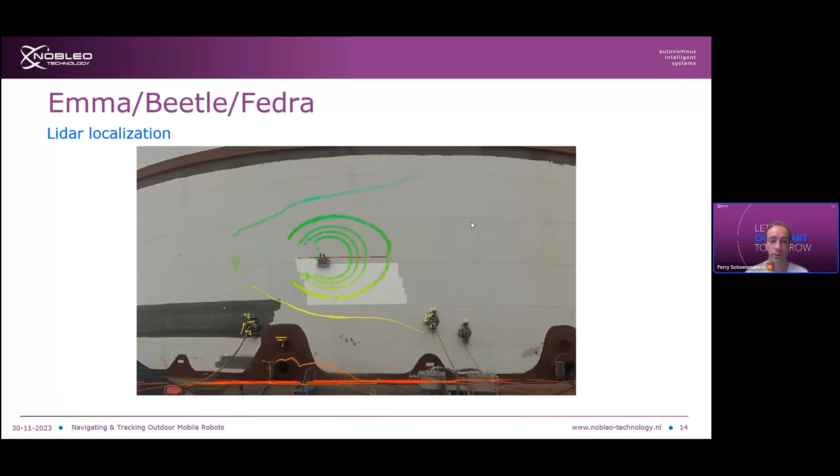Also if there are other features, for example on the ground, which you can see in the left bottom, we can also take these features into account. And you can also use the LiDAR system for an estimation of your horizontal position. So here you can see the overlay of the video of the robot driving around and the data of the LiDAR system, but also the path planning that it tries to do. In this case, we're trying to follow horizontal lines, and then we painted the parts that we already went to.

One final solution I wanted to highlight, we also tested what would be a local solution to have absolute localization on the system. An idea could be to use a camera system and so-called AR markers. So you stick some of the markers to the wall and one or more markers to the robot, and then you can reference those markers to each other.

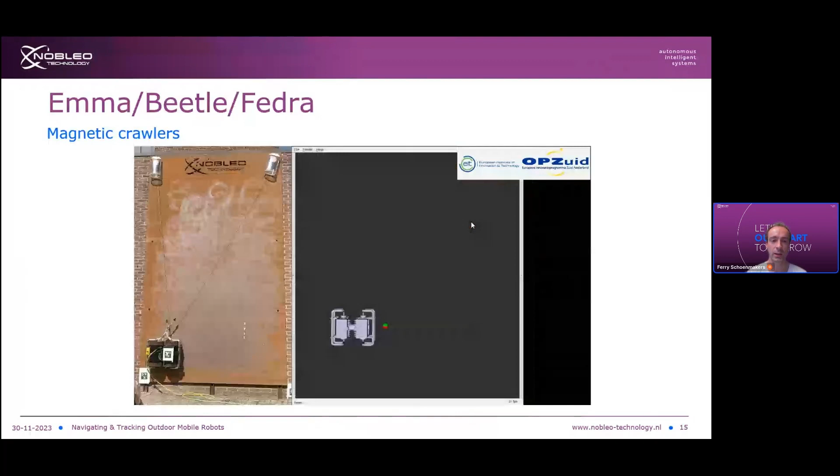This requires, of course, an external system with an external camera. But once you have this system set up, you have a very high precision localization system, which is independent of the rest of the surroundings. So if there's no big features nearby which the LiDAR can utilize, then you can, for example, fall back to this solution.

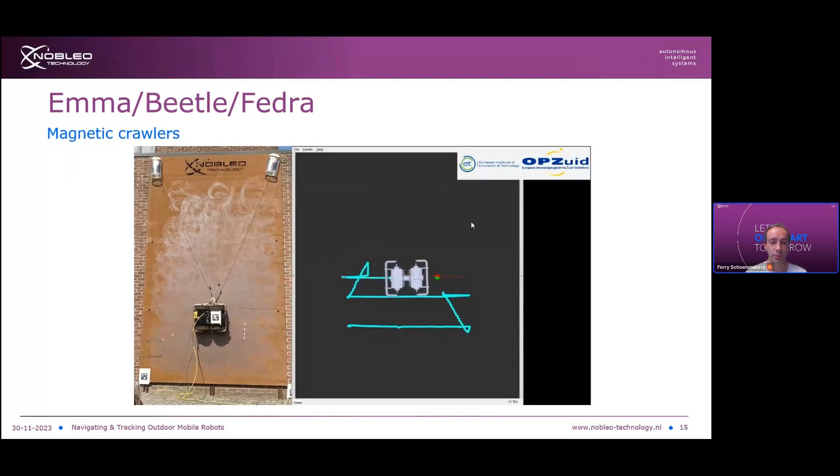You can also see that the robot, again, while rotating, drifted downwards because of the weight. But with this system, of course, you can easily detect that and again compensate for it. These markers are then printed on magnetic paper, so it's very easy also to apply them.

So that's for the magnetic crawlers. The last application I wanted to highlight is the autonomous tractor, which we call Harvey in the timeline. This is an agricultural application, which you've already seen before as well. The machine is being built by the Dutch company AgXeed. They have a lot of knowledge in the agricultural domain and the building of these machines. And Nobleo is cooperating with this company to make the autonomy software on this robot.

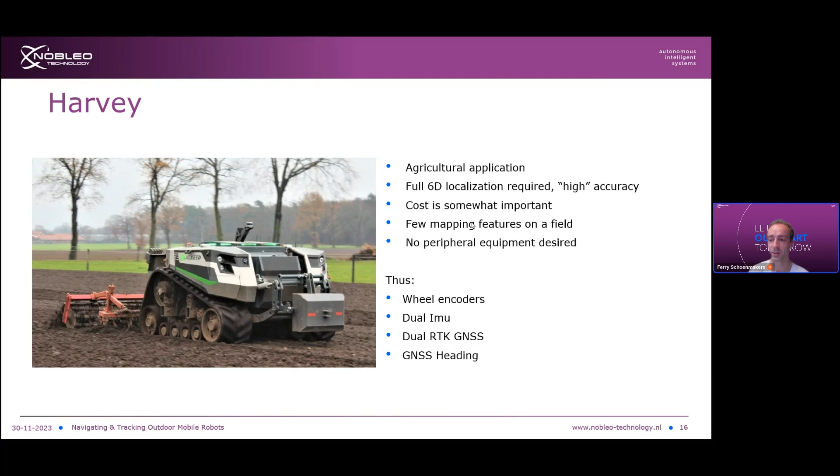As mentioned, the navigation part here is just as important as the localization part, especially if you're driving lines on a field where you do work. You definitely want neat and straight lines. The last thing a farmer wants is that his field is all skew and sloppy, and the neighbor looks at it like, what did you do, a shitty job? So you really want good performance and straight lines.

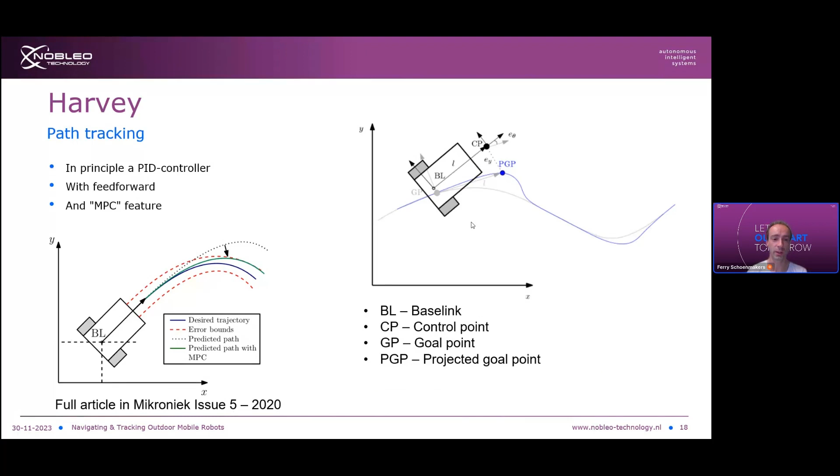So yeah, that's some highlights about the navigation of this system. Again, we presented this in the same Mikroniek article, issue 5 of 2020. So if you want to know more about this, you can look it up.

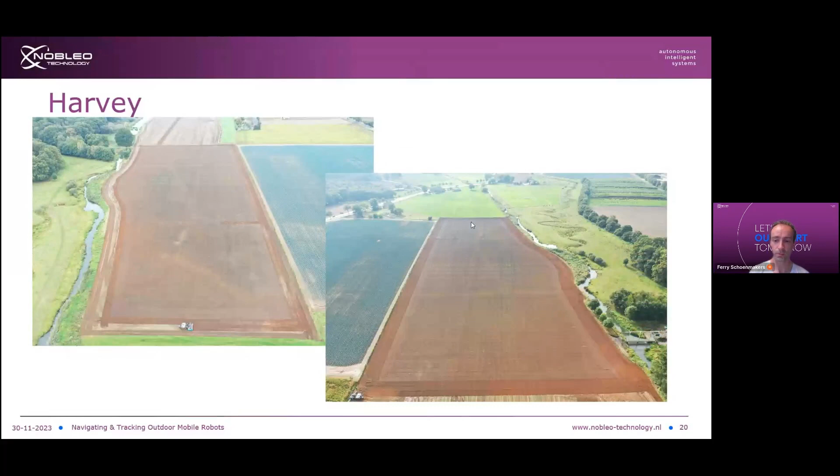And then if you execute this plan, you get a result like you can see here in the drone shots. And that was basically what I wanted to tell so far.

Okay, excellent. Thank you very much, Ferry. A lot of information, very in-depth, very open. Thank you for that, showing really your expertise in the field. Also nice to see that people joining this conference thought about ground mobile robots. It's not only about ground, it's also at sea and also even climbing walls. That's really spectacular what you guys are doing. It's really 3D stuff.

I have one question here from Jan. For the Harvey robot, why do you use the dual IMUs? Yeah, that's a good question. In principle it's not necessary because you can have enough information with a single IMU. In this case it's mainly for redundancy purposes. We have seen some interesting situations where some IMUs sometimes get a bit confused, and that mainly seems to be caused by the vibrations from the diesel engine on board. So for redundancy, we have two systems mounted in a different location, such that we can ignore these strange scenarios.

Okay, thank you. And Teresa is asking, do you use AutoWare for the localization and navigation of any of your robots? Yeah, that's a good question. We don't use it in the deployed software, but we're definitely always looking at what they are developing, because they have a very big set of very nice software tools for the autonomous domain. But as the name implies, they're mainly focused on autonomous driving on the road. A lot of them also highly depend on LiDAR localization, which is very hard to do for us on a field where there are no features at all. So there's definitely some interesting aspects of their tools, but we don't use them in the deployed software.